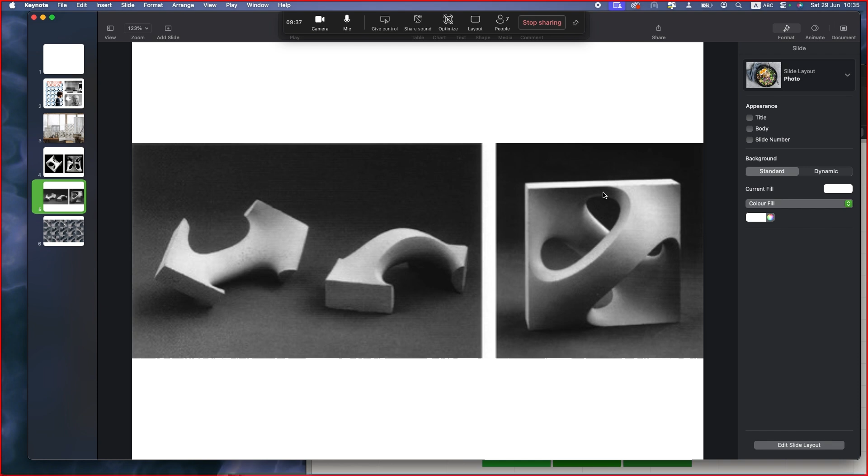And in reality, even though they look quite complex, the module by itself is pretty easy. It's just one shape that is not that hard. So this module here, for example, is the one that he used to create this one, because the actual module is this.

So it repeats in space like this. Okay, I got a little bit ahead, but okay. So it makes this effect here.

So today I will show you quite an easy way to reproduce this type of thing. Even though there are many things that you can do, like you can make it completely parametric, so that the pattern inside is also parameterized. Today we don't have that much time because we will be talking for about 1 hour, 1 hour and a half. So I will show you an easy way to do it,

and also a pretty fun one. If you have basic skills in Grasshopper, you can do it. But I expect that you already know how to move around in Grasshopper, how to put in components, what the panels are, so that you know how to move around.

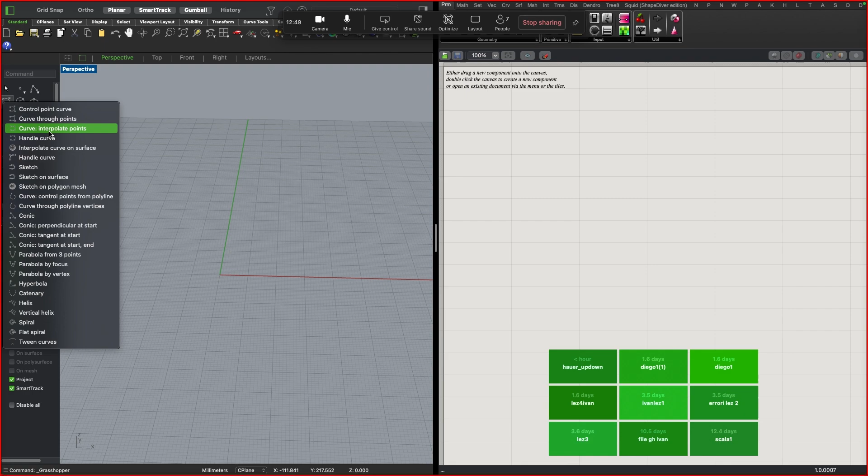I will use Curve Interpolate Points to create one side, and I will just do a wavy thing. With Alt held, I'm going to click on the blue arrow and just write a value, so it will make a copy of my line. And then I'm going to use the gumball and scale with the green square, and I will just slightly turn it.

And then maybe I will slightly change it so that it gives us a little bit of a different feeling. No, this is ugly. Okay, like this. So, let's just loft it.

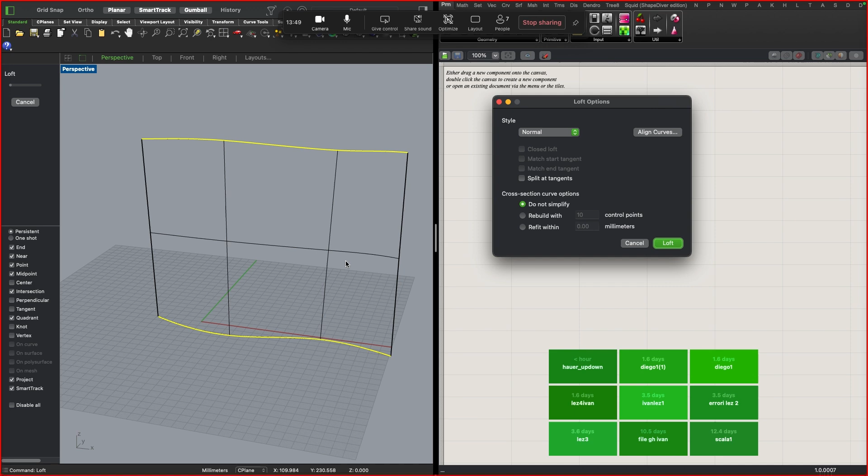Okay. Okay, let me just flip it. Okay, so here we are.

So we will start with doing this one here, as I said, just because the module is easier. Where is it? Here, this one. So this one basically is one strip on the bottom and one strip on the top part. And then they repeat itself, and the point where they connect, they create this kind of shape of a cross.

So in this webinar, I saw that many people do it differently. Today we will be working with meshes, because since we're gonna make a pattern that will consist of many modulars, the meshes, when you apply them, are a lot less consuming. And then you can also get these really soft shapes with the meshes by subdivision. I will show you today how to do it.

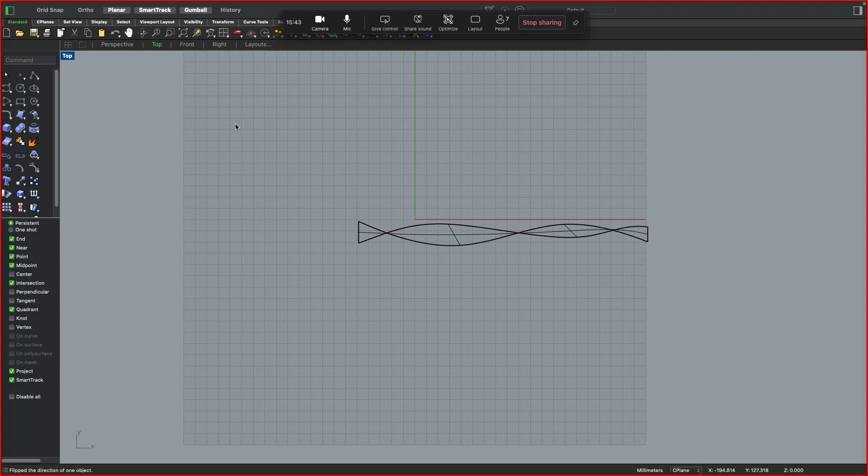So you can start from a really simple basic shape made of polygons. Then we're gonna transfer it to the mesh. And then after the whole is done, we're gonna do a subdivision. So in order to do those stripes there, I'm gonna start with a simple square. The square can have whatever size that you want. And I'm gonna start with a simple polygon here, like this, going to the middle.

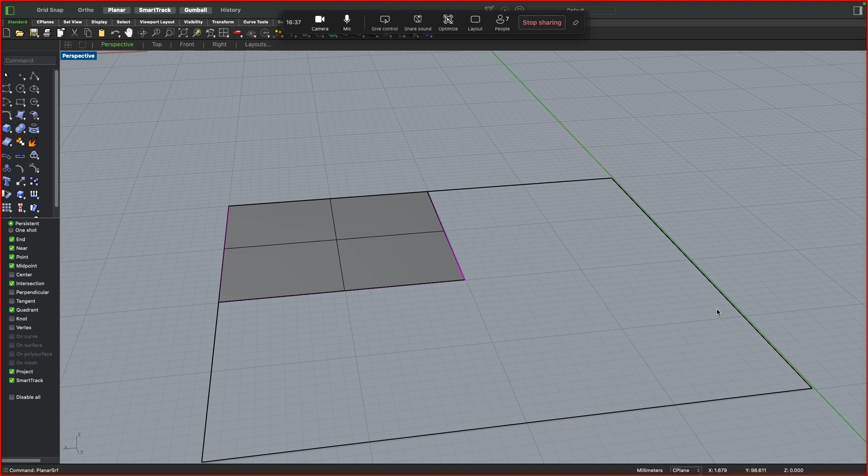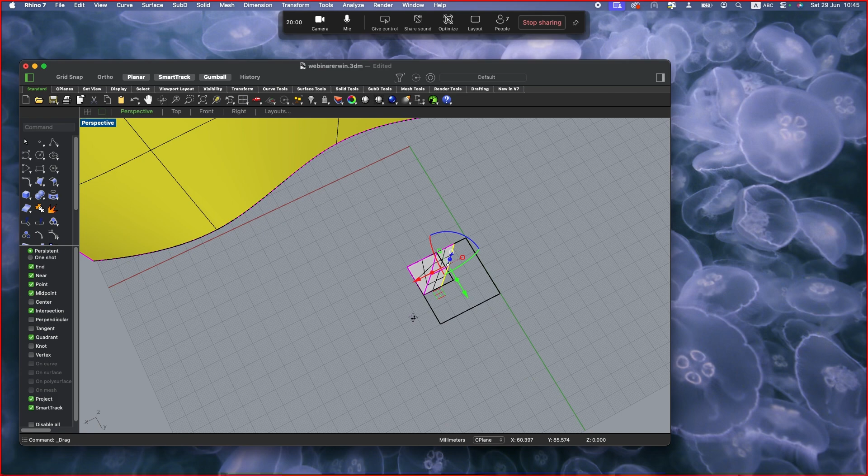And then what I'm gonna do is make a planar surface. And by clicking Command, or Control Shift if you're on Windows, I can just choose one point. Okay, now wait, I will copy this one for a moment. So I'm gonna choose my vertex and just move it here. Here it is. And then I'm gonna just extrude it here. I know it looks strange, but it will look fine.

Maybe I will just make the lines. Okay, maybe we will just do it from the lines. So basically what we are trying to shape is something like this. So I'm gonna do a diagonal line to do it. And then here it is. Then I'm gonna put a point here wherever I want to, and make the line like this. Then I'm gonna mirror it, and then mirror it again.

So since we are working with meshes, the important thing is that all of the polygons that you use have to have 4 edges. It can be only 4 in order for it to work well. Sometimes you also do 3, so there are triangular meshes and there are quad meshes. I suggest, at least in the start, just to do quad meshes.

And now we just need to do one mesh here. So I'm gonna use polyline. Here it is. So I'm making a closed curve and then I'm making a planar surface. Then I'm going to mirror it like this and like this. Then I'm just going to unite all of them, and with Control Shift I'm gonna choose these edges here, and with the gumball I just put them up like this. So we got something. I will just flip it.

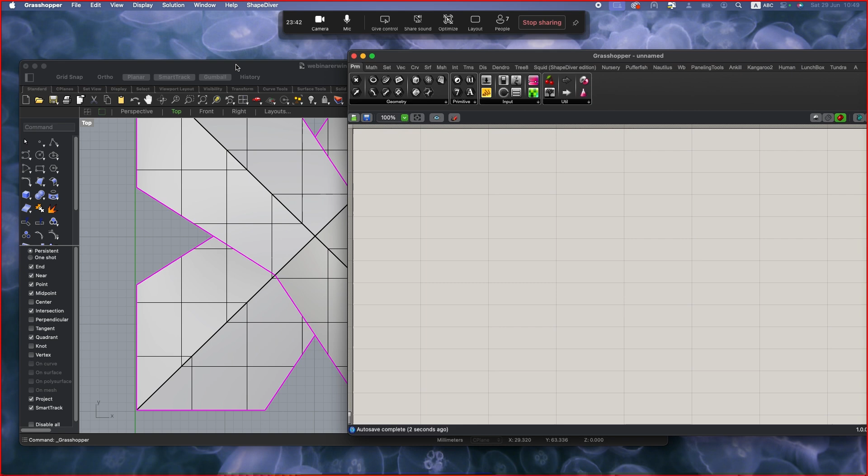Now we need to apply it to our surface. So I'm going to Grasshopper. New document. Okay, since I basically made surfaces, I need to convert them into meshes. So I'm gonna select both of these elements here, and I double click and I write brep because it's a brep. And then I need to transform it into the mesh. Set multiple breps so that both of them get inside of the same one.

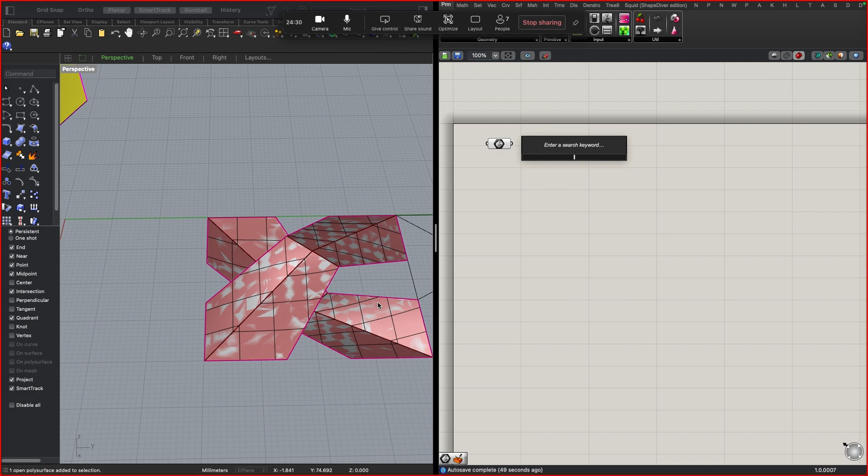And for this, there is this instrument that is called simple mesh, because in this case I want us to have the simplest geometry possible. Since I designed it in this way, that it has 4 edges all the time, I can just tell it to follow the most basic structure. So when you go to the Mesh tab, to the Util panel, you can choose this instrument that is called Simple Mesh, if it clicks. If it clicks. Why?

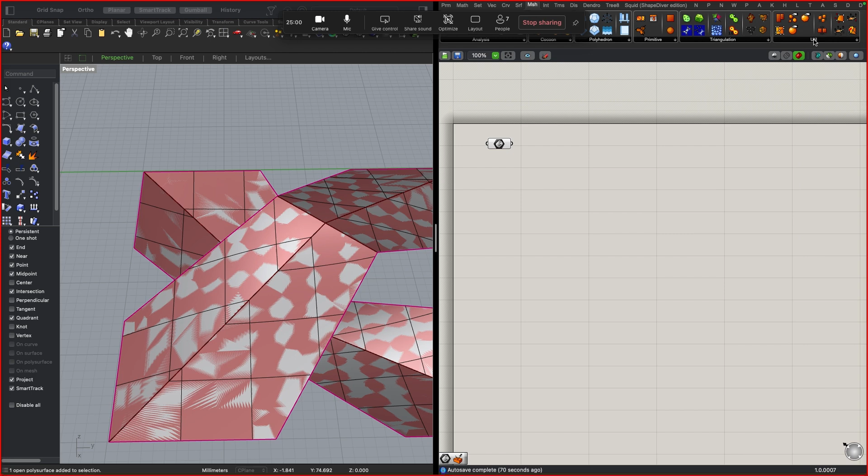Okay, I will just type it, but in case you know that it's in util. So simple mesh. And I connect the brep to the mesh, and here it is. So this is really good for when you have something really simple. And the only thing that you have to have in mind is that it has to be only 4 edges.

And when I'm going to use Weaverbird, there is this instrument that is called SubD. As we know from Rhino 7, we have SubD already integrated into the official version of Rhino. But SubD in reality existed many years before, because it's a mathematical formula of tessellation of the mesh. So basically what does SubD do? It subdivides your mesh, all the edges get twice more points. That's why they get more curvature.

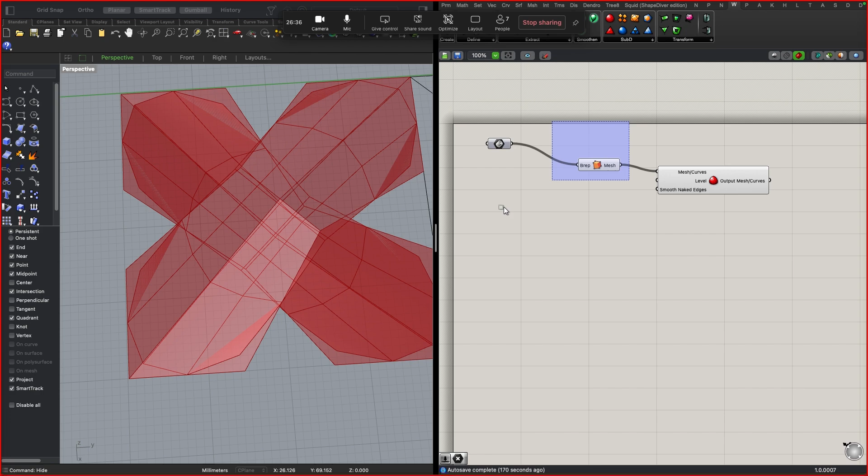So if you go to Weaverbird, one of the plugins that I sent you by email yesterday, they have this whole panel SubD, where you can do different subdivisions. And for the quad mesh, in order to smooth it out, you should use Weaverbird Catmull-Clark subdivision. It's the one that is used with the SubD faces. So I will put it here. I just want to show you what will happen with your geometry after. It will start to smooth out.

So you can get super smooth shapes in almost no time. In this case, I have smoothing also of the naked edges. If I put the corner fixed, it would look more like this. So you can use a really simple geometry in order to arrive at a really smooth one after. So I will delete it because we don't need it for now. We will use it later.

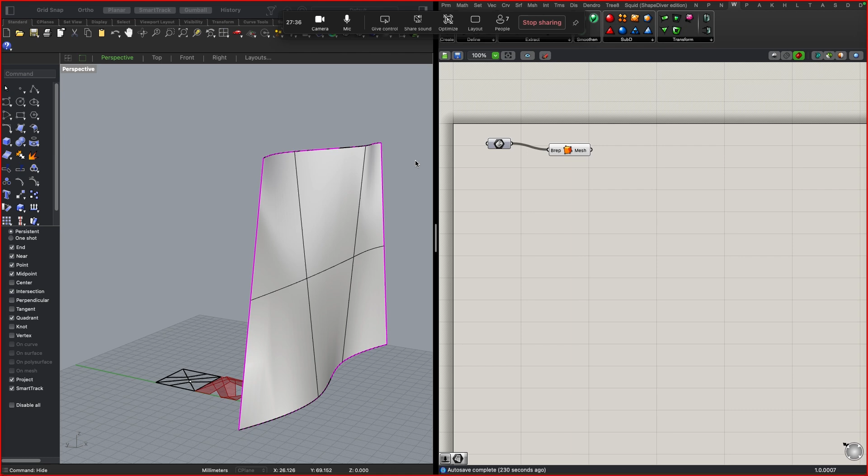And we're going to use this technique of paneling, when you subdivide your surface or your mesh into quad panels, and then each quad panel will be like a box container. So in this case here, I'm having a surface. So what we can use is, for example, we can go to Pufferfish. Okay, Pufferfish, where is it? Pufferfish is a plugin that I also asked you to install. It's because it has really fast tools to make transform boxes in a minute, so that you don't need to suffer.

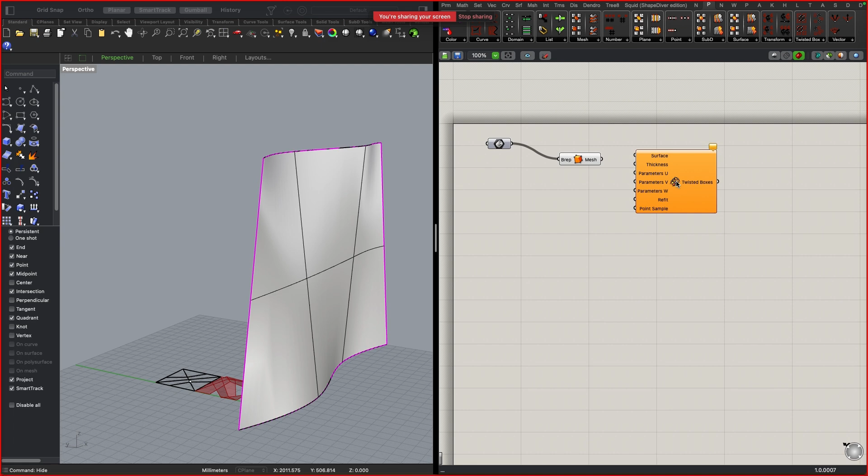So if you go to the surface, we will use the one that is not here, because it will be in the twisted box. Yes. So here we will use surface twisted box, we just need one surface. Twisted box surface. It's the simplest one. So this one just takes your surface that we obviously need to put from Rhino. So we double click, we write surface. Here we have the container for the surfaces, and we click and set one surface. We connect it to the surface input.

Then it asks us for the thickness. Basically, it's how profound you want your pattern to be. So you just do a slider, double click, and you write from 0 to 2 to 100. We will see in the future what will work best. Okay, in this case, let me just hide it. Okay, in this case, by default, it makes you 2 boxes. I need just one, so I need to change my parameters.

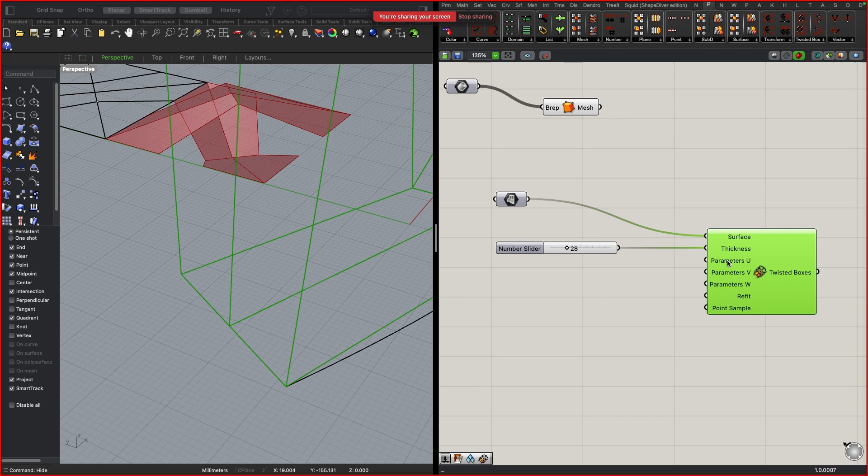So here, it will ask me for division parameters along surface U domain and V domain. So basically this is how many boxes you want in this direction and how many boxes you want in that direction. In order to do it, you put a range component, with the number of steps, where steps will be the amount of boxes that you want. Here, by default, you have domain from 0 to 1. So the range will be all of these numbers from 0 to 1. And if I connect it to U, you will see it changes the number of boxes.

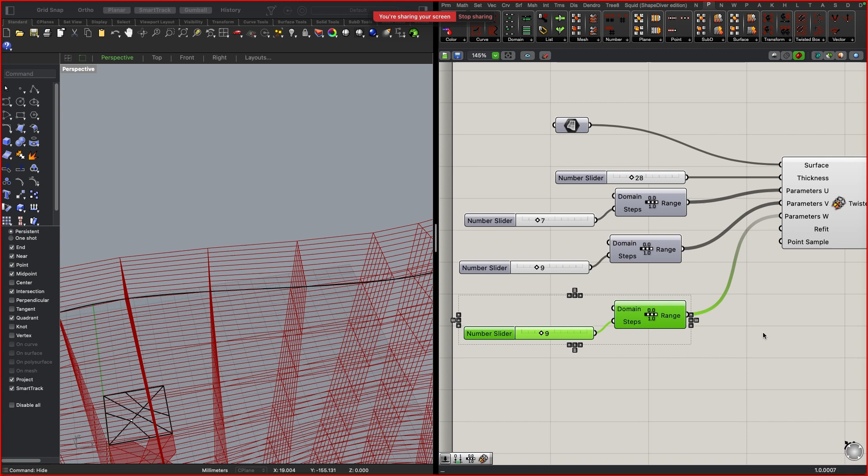So I'm just going to Ctrl+C, Ctrl+V. Here it is. And then you can just put the amount of boxes that you want. Here I have 2 boxes because by default it is making 2, but I need just 1. So I will Ctrl+C, Ctrl+V, and I will put here 1. If you put 0, nothing works, so don't put 0. Okay, so we have boxes.

Okay, and now what we got here is the twisted box. I have it kind of too thick maybe, so let me just make it smaller. And then we're gonna use the tool from the transform toolbar, and we will use the instruments from the morph column. And we're gonna use the one that is called box morph.

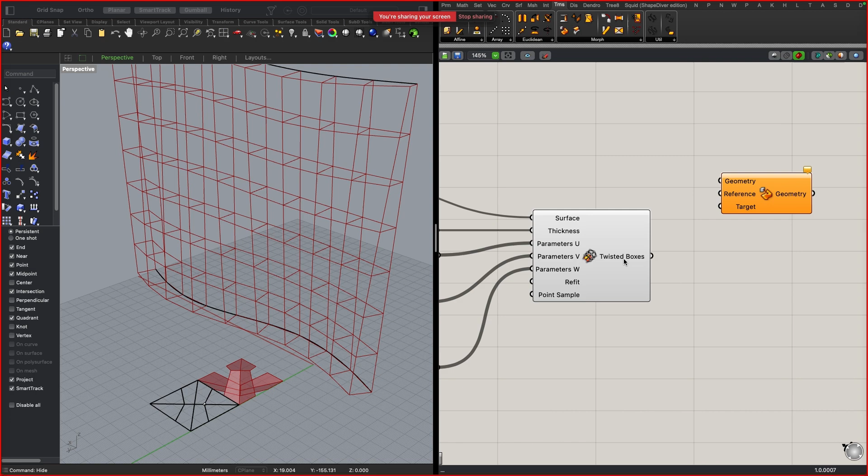It requires a target, so basically this is the boxes that I want to map this one to. As you have seen, I already made it into the box shape, so this is useful. So I put it here. Then the geometry is the one that I put here, and the reference, it's asking me for the reference box. So basically, what is the box that contains this geometry? In order to do it, you can just use the primitive container box, bounding box. Here we are. And you just connect it here.

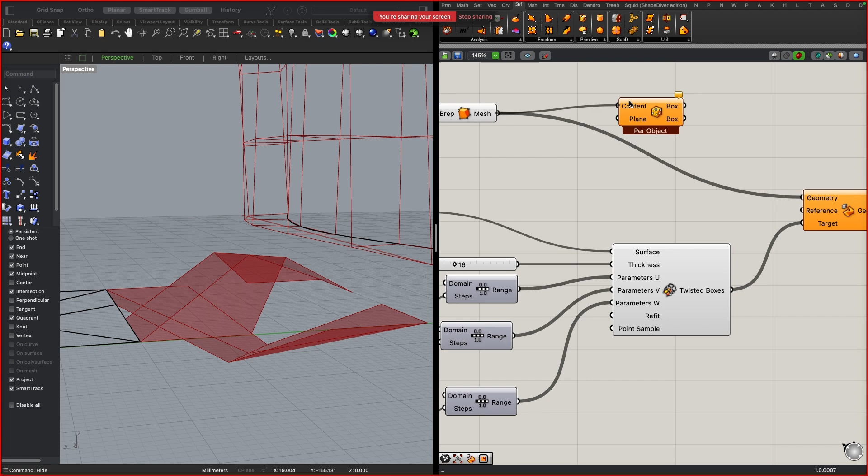But you will see 2 boxes actually here. I don't know if it's noticeable on the screen, but if I put a panel here, you will see box 0, box 1. We need just 1 box for all of the geometry. So in order to do it, I need to right-click here and click union box. And then we put it into the reference.

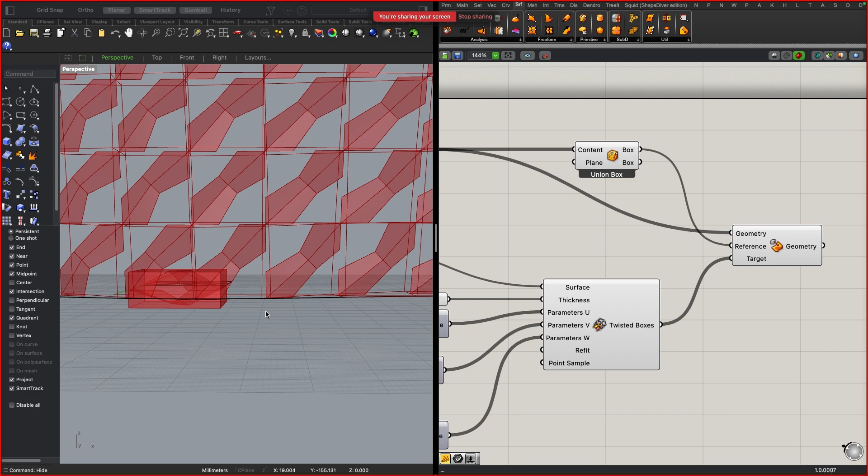And here we are. But as you have seen, something strange is going on. It just put only 1 element. Why is that? It's because of the way Grasshopper works: when you do this type of thing, if you have more than 1 component that you want to move inside, you have to group. So you just put group, and you put it into geometry. And here we are. Pretty.

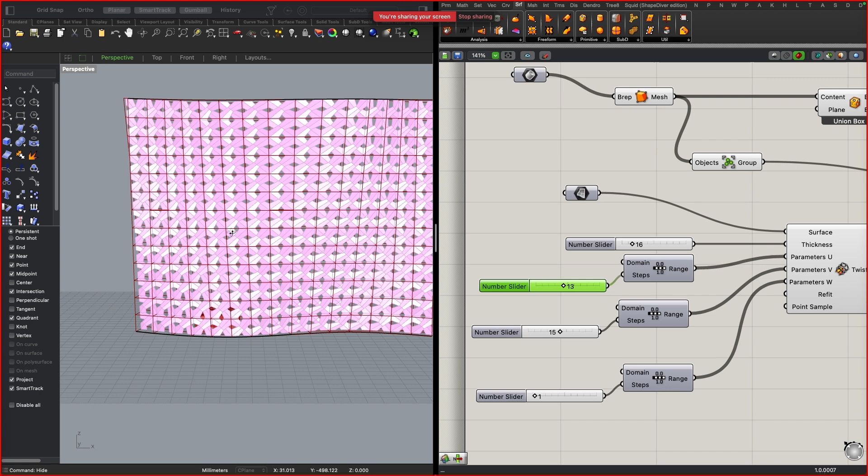So let's do preview. And now when we move around, we get different density of the pattern. Yeah. So kind of cool. And the great thing about it is that if, for example, I want to change my pattern, like I decided that the opening is too small. Oh no, I wasn't supposed to choose it here, on the top. And I will just use the scale. Here it is. You will see that everything here updated as well.

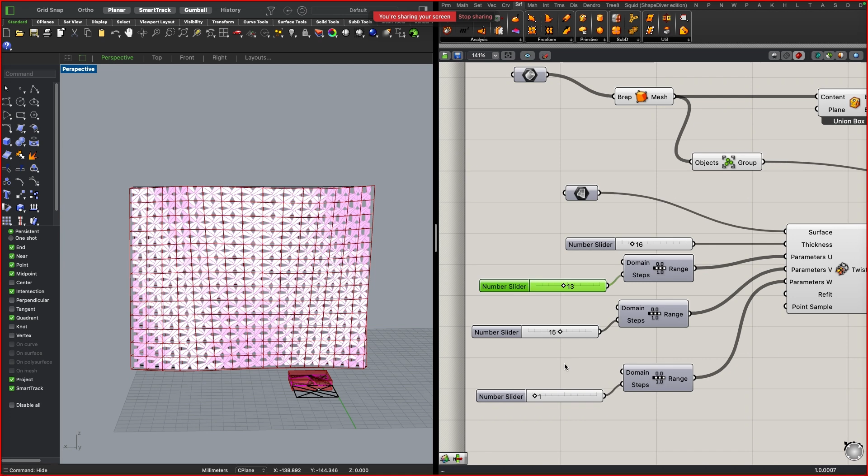Okay, great. So now we want to smooth it out. We got our basic geometry, it's there. So let's just go ahead and smooth it. But before we do it, we do ungroup. Ungroup, here it is. And then we will have all of these groups here. So basically, if I call the param viewer, if you don't know what it is, it's basically a tool that helps you to see your data tree. So we will have a bunch of groups and all of them have these two elements here. So here it is. So if you see the tree, a lot of lines.

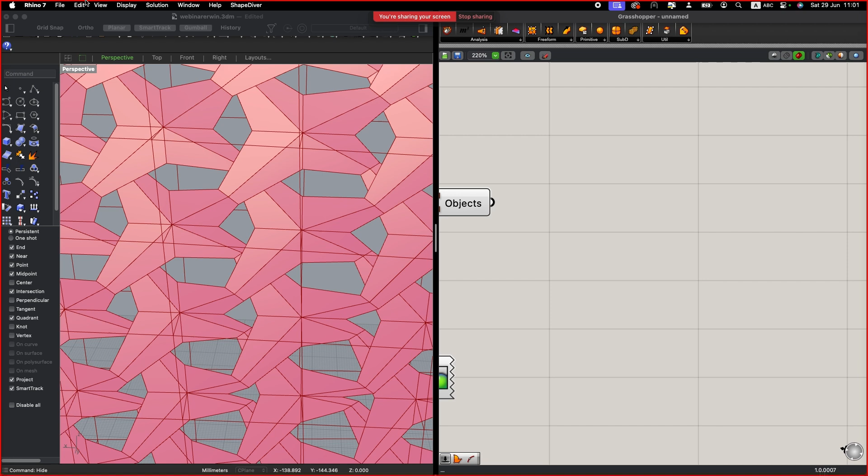But in order to smooth it out in the right way, I cannot just smooth out this, because let me show you, and also I should save, you know, because with my computer, as we understood, save is important. Okay.

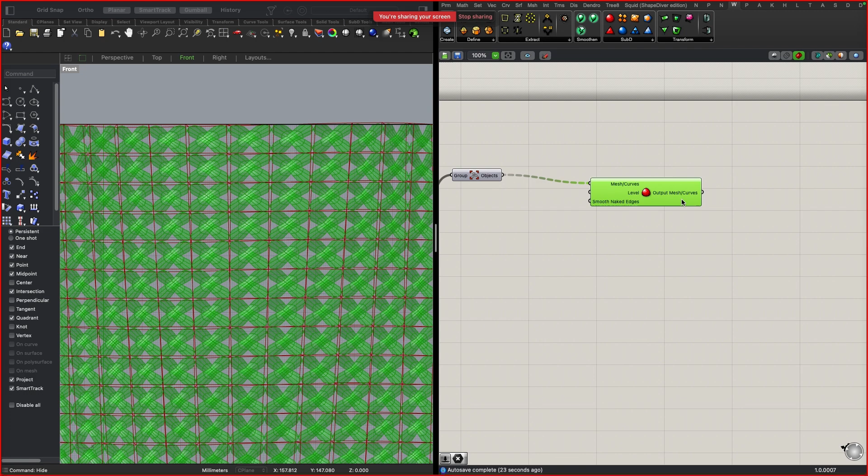So let's say I will do the SubD thing right now. It will not look pretty. Here. This is not what we wanted, because we have all of these holes, even though it could be an idea also, it's not that bad, but it's not what I wanted. It happens because it is doing subdivision on each separate mesh. So I need just one united mesh for this now. So in order to do it, I'm gonna flatten the list.

Here. And then it's many meshes. It's 300 meshes right now. So what I need to do is I need to join the mesh and then I need to weld it. So what we're gonna do, we go to mesh, util, and we're gonna choose mesh join here. And we connect our tree to mesh join. So, okay, joined.

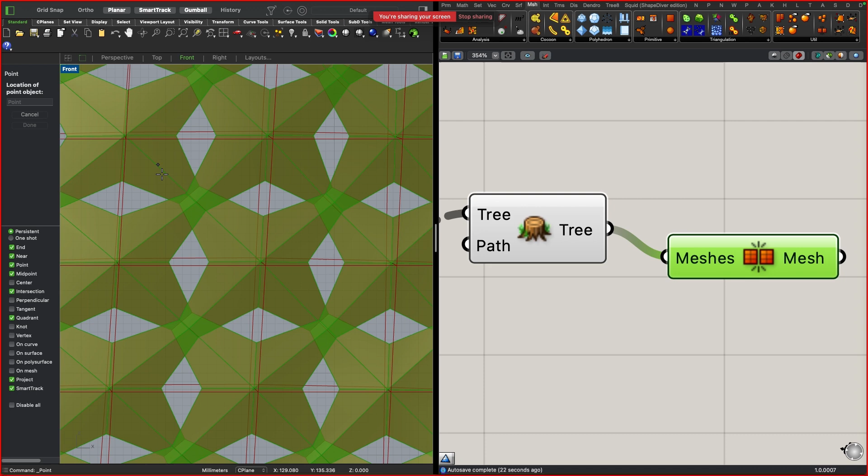But now we need also to weld it, so that it's all clean, because sometimes we need to align vertices, we need to clean it, because when you unite the mesh like this, you have some points that overlap. Like, for example, where I have the lines, here, in reality it's 5 different points from 5 different meshes. Sometimes your program will do a good job aligning vertices by itself, but most of the time, no.

So I suggest you use this component from Kangaroo. We made another webinar about Kangaroo, but basically it's a physical simulation, and it has some really great components that you can use also outside of the physical simulation. And there is this one that is called Combine and Clean Mesh. So basically, instead of writing align the vertices and all of these commands, you just connect this one and it will make you a nice, clean, cute mesh here. Here.

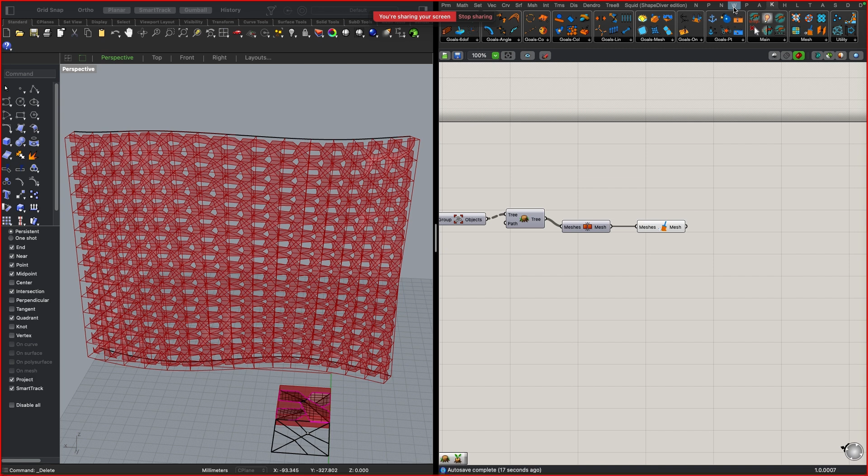Here it is. And then here on this one, we can start to subdivide. This is where shit gets pretty. So. Also, it still makes mistakes.

So also, we probably need to align it anyway. So you go to Util and we choose the align vertices. Sometimes it happens because, for example, in my document here, I have the tolerance of 0.001. So it's a really high tolerance that you usually never need, but I have it.

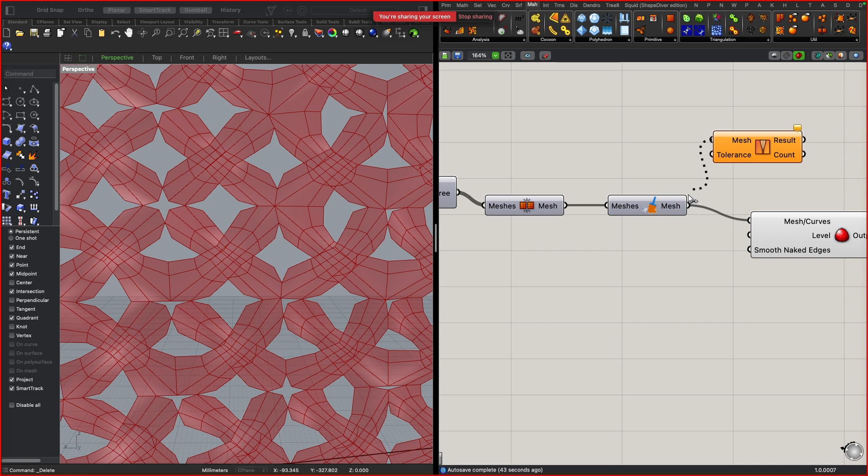So I'm gonna connect my mesh to the clean mesh, and here in the tolerance, I'm gonna put 0.1. So all of the vertices that are in the radius of 0.1, they will get smashed together, they will pull and it will become just one point. So let's try this and see how it works. And it works. No, it doesn't.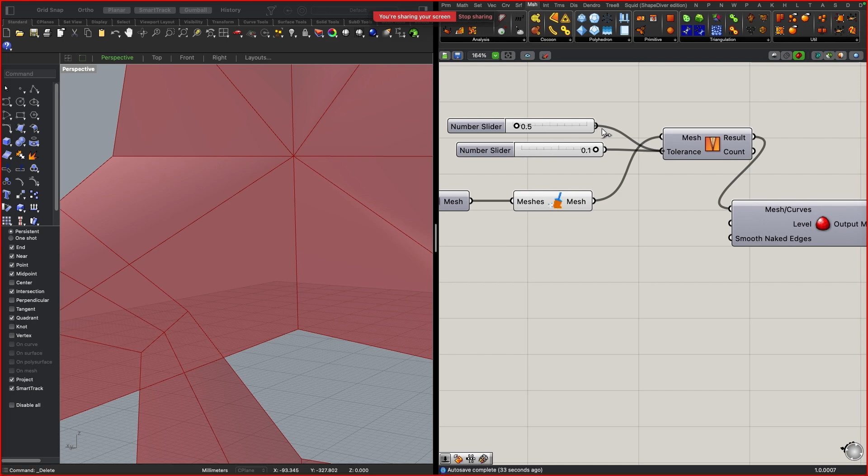Let me see what happens here. Preview off, preview off. Let's see. Okay, so he is having problem with aligning these babies. So I'm just gonna put a bigger threshold. So 0.5 to 0.1, and we will see if it will work. Echo. Yeah, now it worked.

So in case if you have the same mistake, the same problem as me, sometimes it works, sometimes it's not. Let's see. So echo. So let me just see for a second, because maybe the problem is my module.

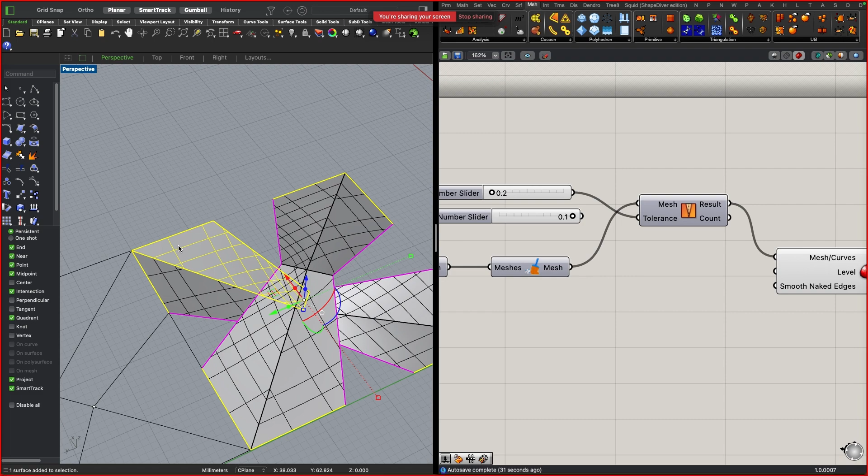So the thing is that this has to be on the same, let's say, panel. So I will just choose all of my edges outside and see if they merge. Let's see. Okay, no, they align perfectly. So let's just do like this. I'm gonna do this and

let me just make it slightly flatter, maybe it will be easier for him. Like this. Okay. So, and I will also make some aligned vertices. And what we should do, we also should flip it. So

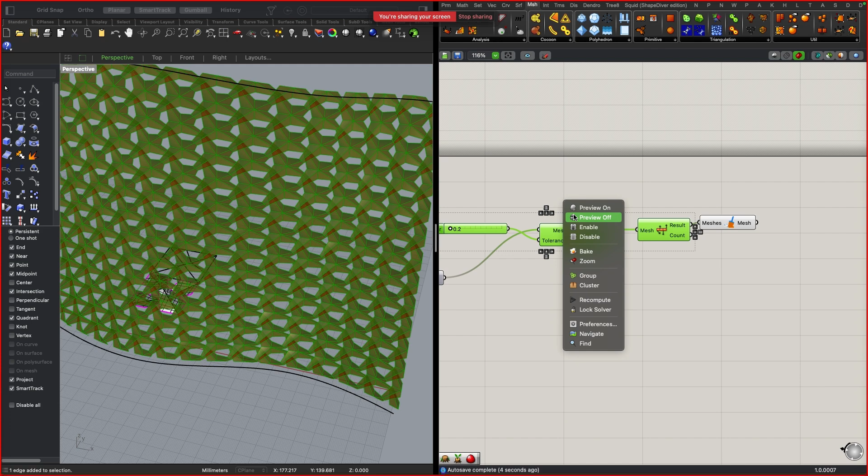we will use unify mesh to unify the normals, because it could be also about unifying them. Here I will still put like 0.2, it should be enough for the tolerance. And then I'm gonna use clean and combine so that it will weld it all together. And now maybe if I'm lucky enough, it's gonna work. But we will see.

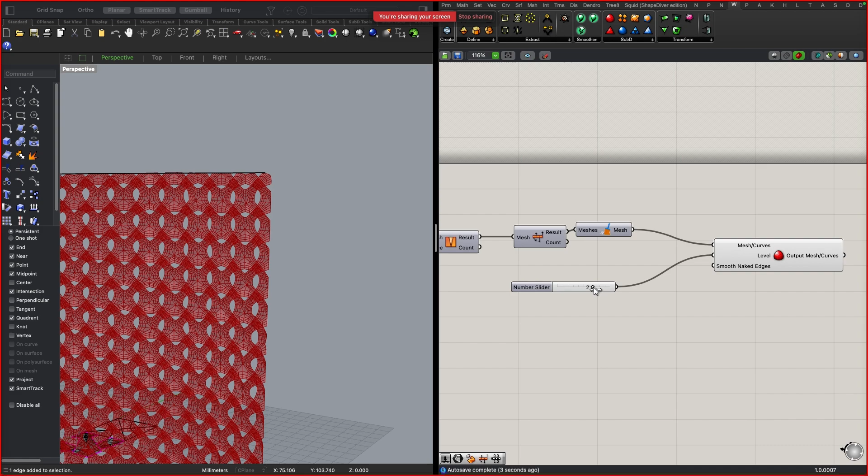Ah, okay, here. So I choose not to smooth out, or at least make the corner fixed so that they meet at the corner, and then it should work. And as the level of subdivision, you can go up to 3. I don't suggest you do it because 3 will take you a lot of computational power, but up to this, it looks nice.

So the problem that we were having was due to these smooth naked edges. So here put corner fixed or smooth here. So here it is. What else could we do, for example? We could make it, for example, that it changes its width, yeah?

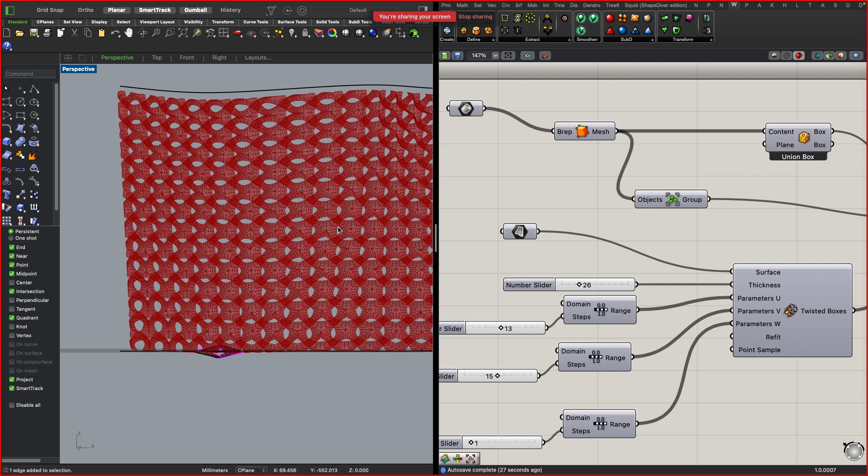So for example, what you could do is that one module is bigger, like the spacing is bigger, and then one module has less spacing. So in order to do it, we do Ctrl C, Ctrl V of these ones here. And basically, let's say I want to have an attractor point somewhere here. And let's say I want to have more holes in the middle, more spacing in the middle.

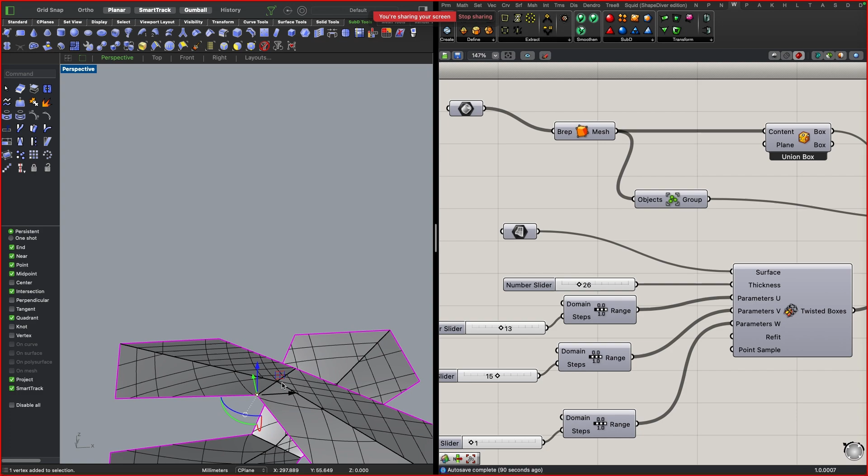So in order to do it, we would have to change our module. So we would have to make the first model and the model where we want to arrive. So I need to choose my edge vertices here. If you're having problems with choosing stuff, if you go to SubD Tools, into the filter here, SubD, here you can choose vertices, and it will allow you to choose the vertices only.

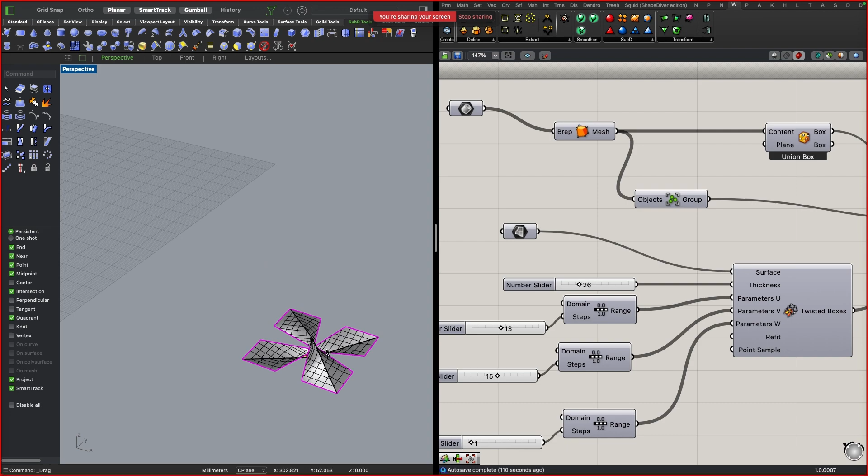So in case you're having problems with Ctrl Shift, Alt Shift, you can just make a filter on this. And I'm gonna make it a lot smaller. Like this. Maybe it's got too small, but okay, we will try. And maybe I want this to be smaller also, because it seems to make too big a space here. So let me just adjust it a little bit.

In order, you see now I cannot move anything because I have the filter on. So you just deselect the filter and then you can delete it. Okay, I will turn off my component here and disable it so that it doesn't update every time I update my module. So I think what I'm gonna do, I will just quickly adjust it.

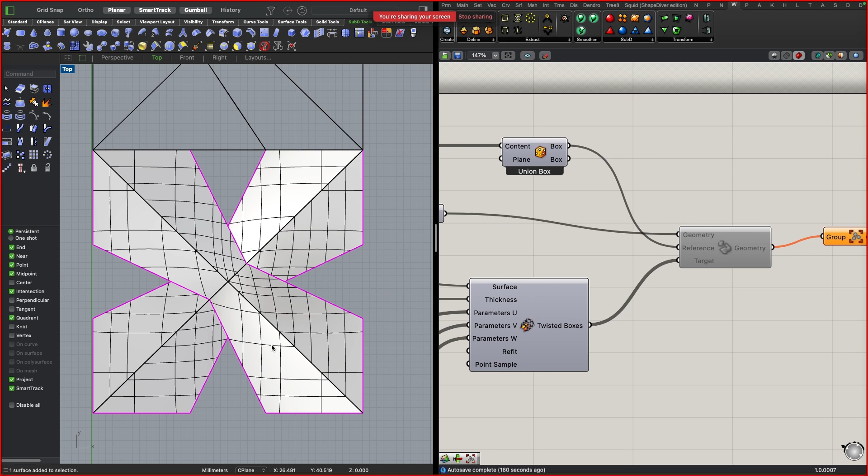So I'm gonna just explode it, and I will just move this a little bit like this, and then I'm just gonna mirror it.

I suggest you have the project activated so that it's easier for you to move things around and that you don't get it rotated in a strange manner. Here it is. Okay.

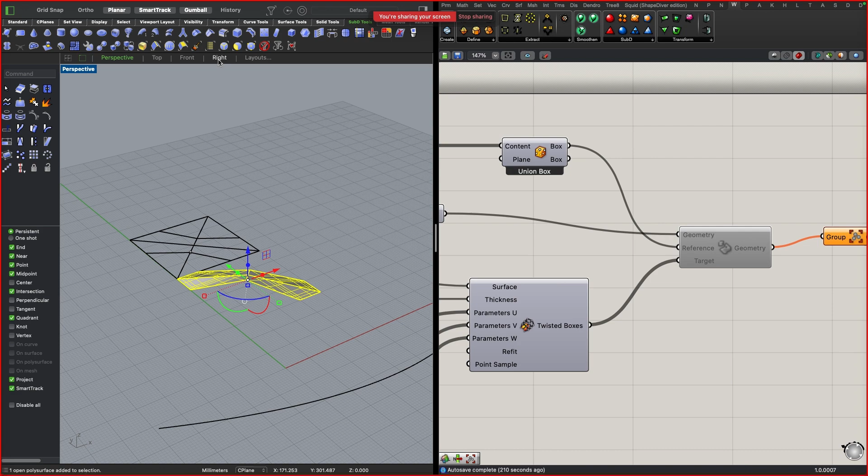And then I'm gonna do the same thing that I did here, and I'm gonna mirror it. Of course you could code this, like everything of this could be coded. It's just that in this webinar it would take us more time. Also, you could calculate this on your panel, for example. There are many things to do it. I'm just showing you one of the easiest ways.

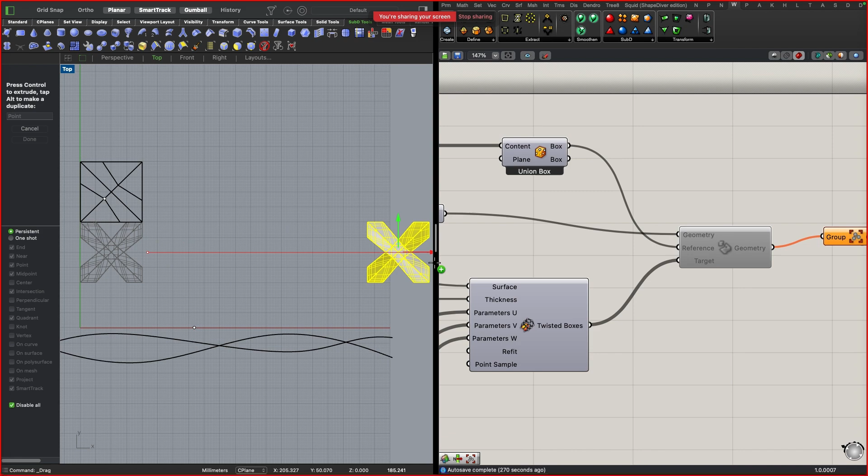Okay, and I will make this larger here. And then I'm gonna make Alt and copy it. Then this one, I'm gonna make it smaller with the scale. Okay, and then this, I'm gonna move it up.

And now, in order to make the transition from one mesh to another, I'm gonna calculate all of the transitions between them.

So basically this is really useful also, for example, in architecture, because in Grasshopper, usually we make these things that change constantly. You have 1 million variations, yes, but usually in architecture you cannot do every module different from each other. You have to have like 6 modules, 7 modules, 10 modules if your project has a big budget. So you cannot do all of these transformations like this if it's not a 3D printed project.

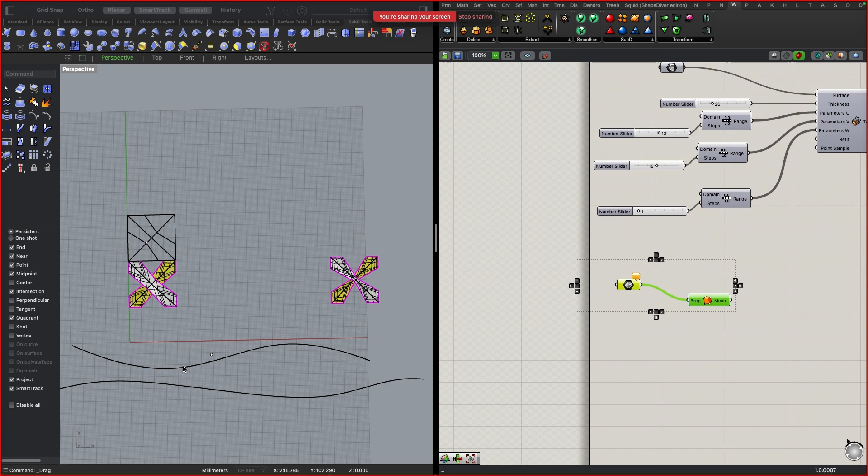You have to have a final number of modules that you can use in your project. So in order to do it, since all of the modules we use here have the same number of edges, the same number of vertices, the same number of everything, we can just make tweening of the shape. So I will add this here, set multiple BRep.

And then I will do the same, Ctrl+C, Ctrl+V, with the new one. Then I'm gonna use join mesh again, and maybe clean and combine mesh also. So I'm gonna combine and clean, and also combine and clean here.

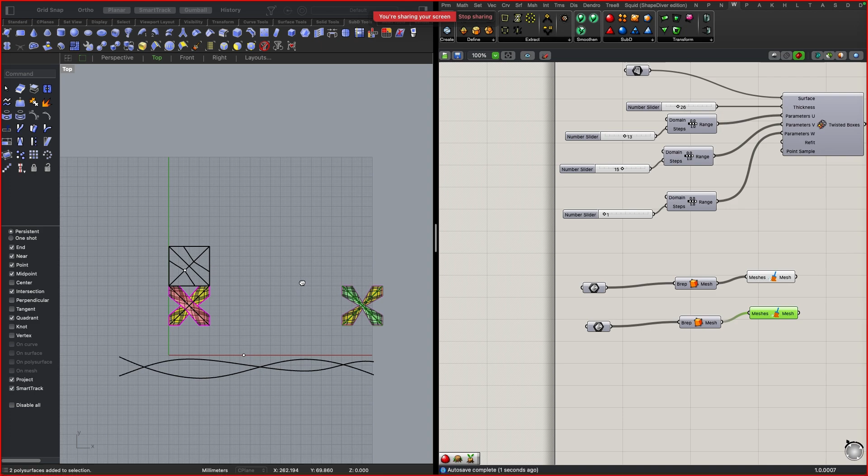So let me just turn off this here. Okay, seems quite cool, they seem to be pretty clean. And now we're gonna use the Pufferfish instrument here.

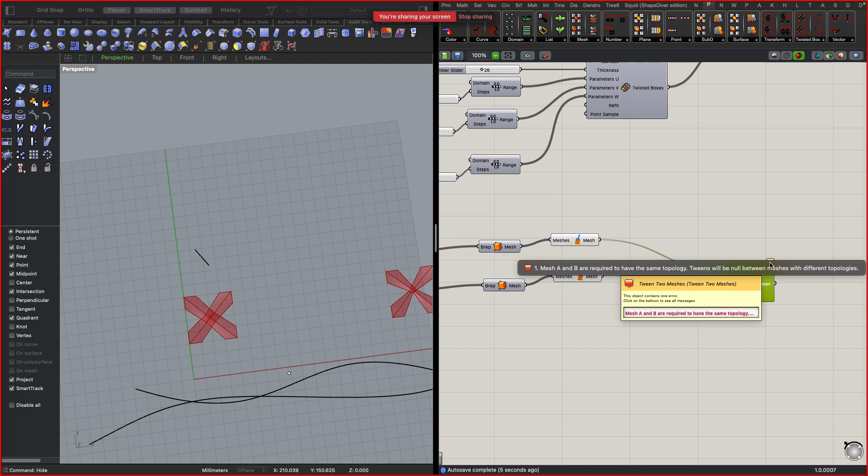And we're gonna use something called Tween Two Meshes. So basically you have mesh A, mesh B, and then you need to add a factor. He says to me... okay, here he says that they're different.

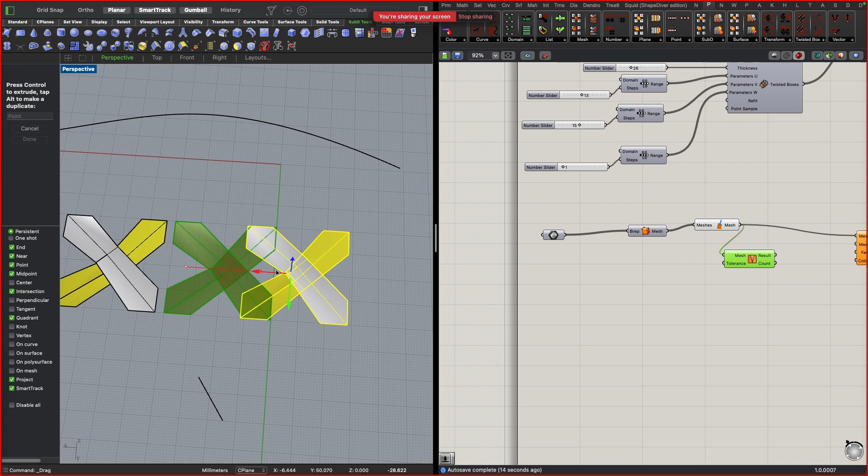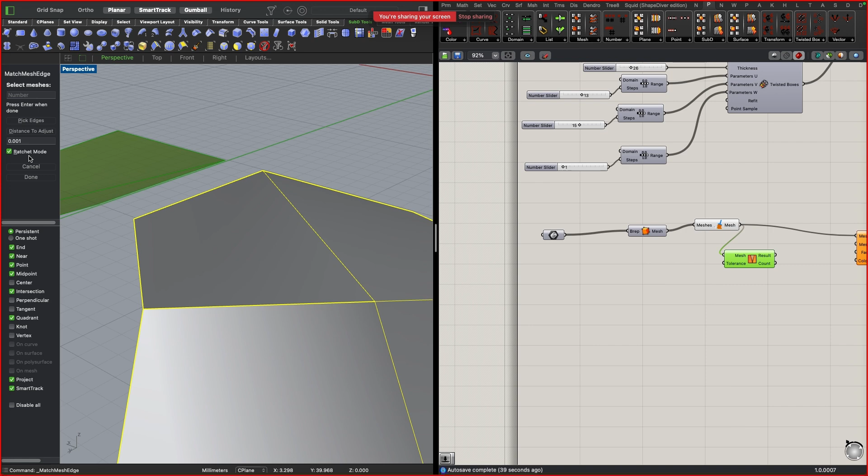So, okay, so that's the problem here, because as you can see, everything is welded except this one. So what we can do, we can go to mesh repair tools and do... let's see if the mesh will work. Okay, maybe we can do join edge. No, here it doesn't work.

Okay, let's use, we will see, weld, angle tolerance. Okay, I think I will just... let's see, collapse. We should do...

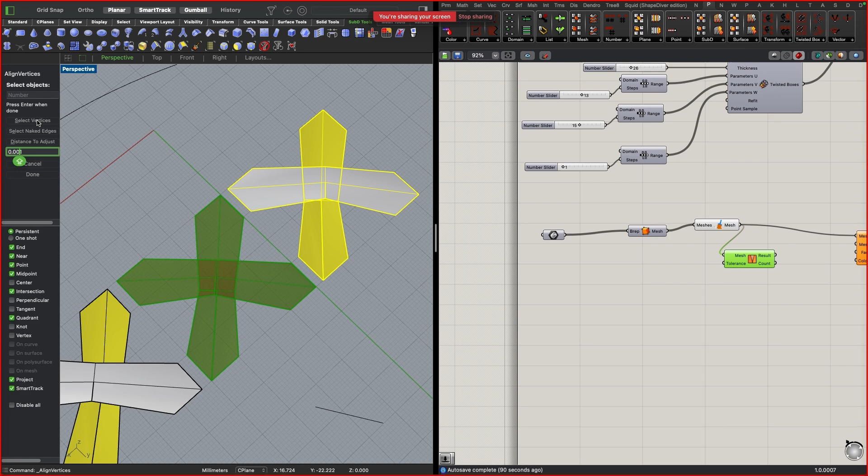Select, okay, so I'm doing align vertices here and I'm just gonna choose my vertices. Okay, no, here, here. There, here it is. This one worked, good.

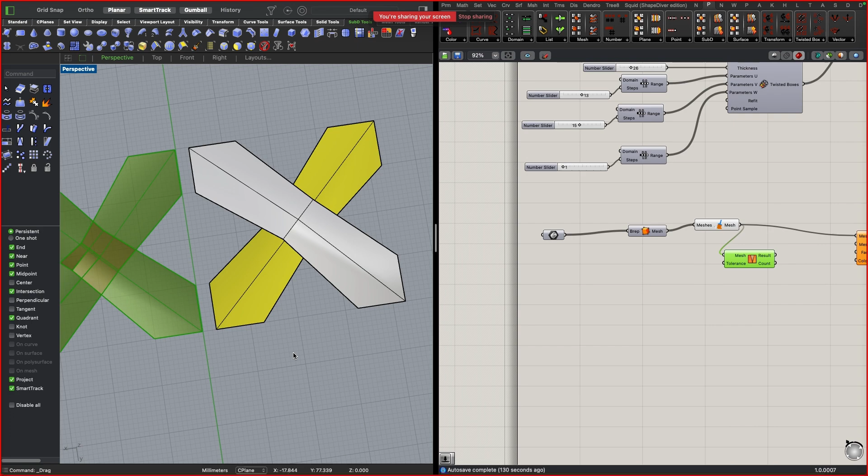So let me delete these ones that didn't work. I'm gonna explode it so that I can delete this one. And this mesh that is already clean, thank God, we will do the mirror. And then rotate it. So now, as you can see, all of the lines are the same, all of the vertices are aligned, so everything is fine, everything works.

So now I will use this one as my next module here. And I will just scale it so that I get this kind of shape.

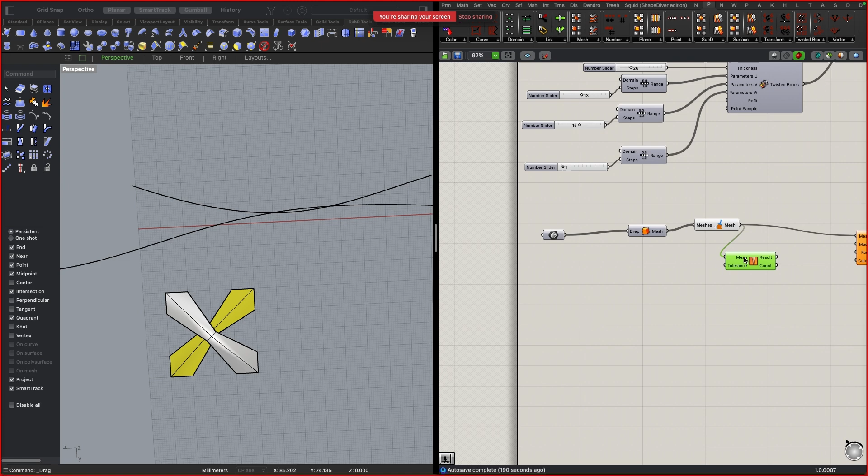Okay, now they will have absolutely the same topology because I used the same approach, basically that's the better way that you should do that. You make one mesh, it works fine, and then you change it. So the only thing that you can do is move around the edges and move around the vertices. Since I already cleaned my mesh, I don't need this.

Mesh, set multiple meshes, and then I will use clean and combine. Here it will be my mesh number 1, and here I will put my another mesh.

So hot today in Milan, I'm dying.

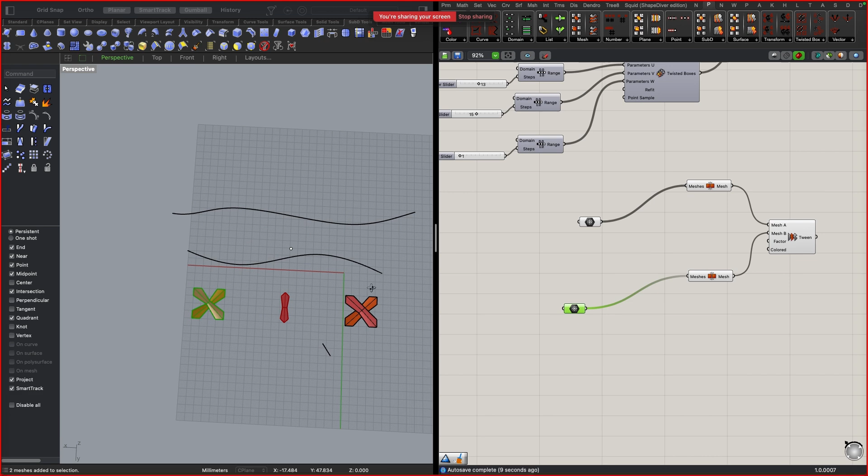Join, let's see, 1 second. So he's just transforming one. Okay, let's see, like this. Okay, so let's do it like that.

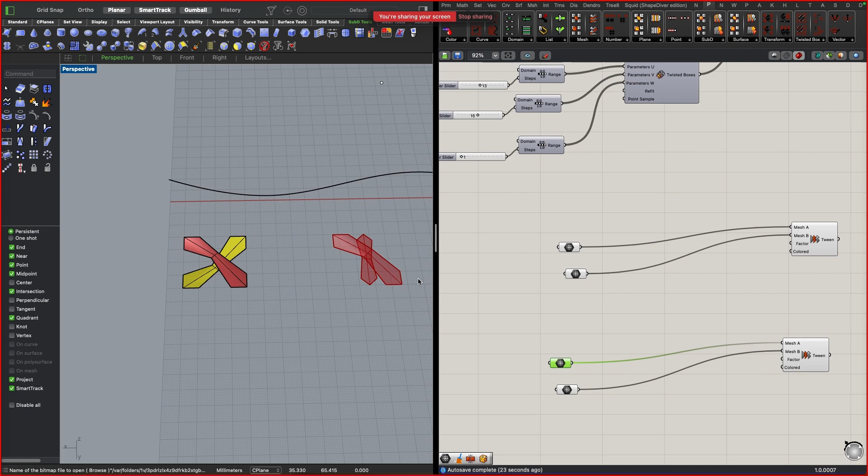So I'm gonna choose these ones on the top. Let's see if it works. Okay, it works, so here he made it. And then we're gonna do the same thing for the bottom ones, since he cannot do it. And now I'm doing the same thing for the bottom part, and for the bottom part here.

So here it is, the factor depends on the range, so it's the same thing as here. We just create a range, we create number of steps, so for example 20. And then we add it here, here, and just give them enough space so that they can breathe.

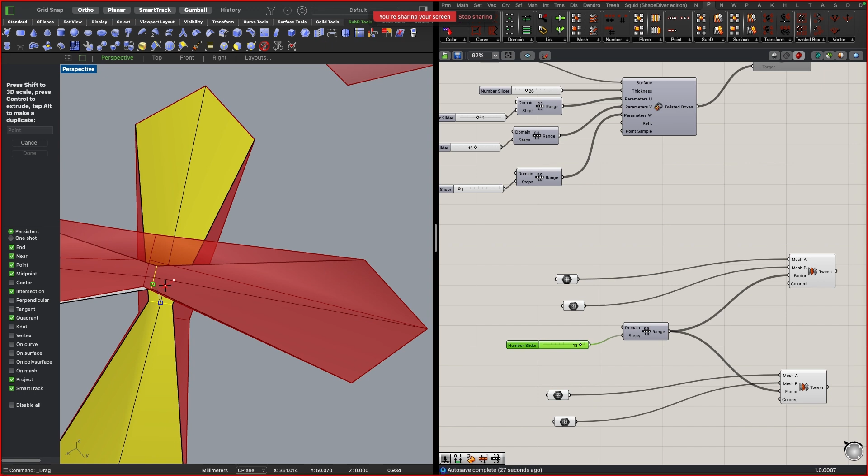So basically what it does, it's tweening from one shape to another. The more dramatic you make the shape difference, the more it can be perceived, let's say. So let me just make... Ecco, so I think now it's pretty obvious.

So here this is going from 1 to this. Perfect, so let's say we want 6 modules here. Okay, 6.

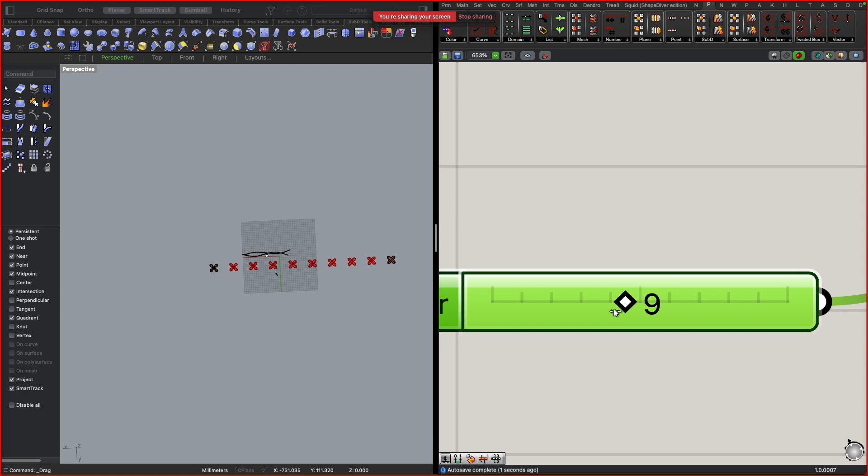And now we have 2 different groups of the meshes, here and here, and we need to combine them because I want this to be in one group. So in order to do it, we do merge, we connect the tween and tween here, and then we do the grafting, so that you're gonna get...

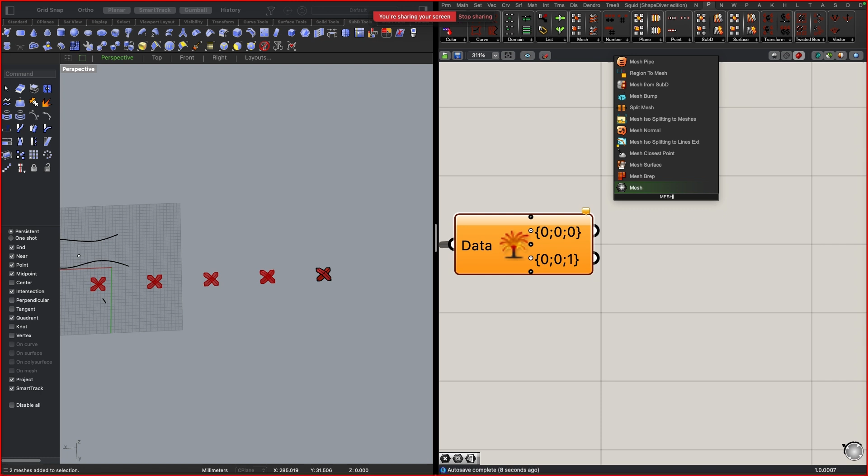them by couples. So if, for example, I'm gonna bang the tree and see what's inside, you will see that now in each group I have my top mesh and my bottom mesh. So let me just connect the mesh to here, and here it is here. So all of them are in their little groups and we can use them as our modules.

Okay, here we have them. And now basically we need to put them here. So we made already twisted boxes here, but now we need to sort them to what is the closest to the point, yeah? So in order to do this, I'm gonna use area. No, sorry, volume, because we need volume. So volume.

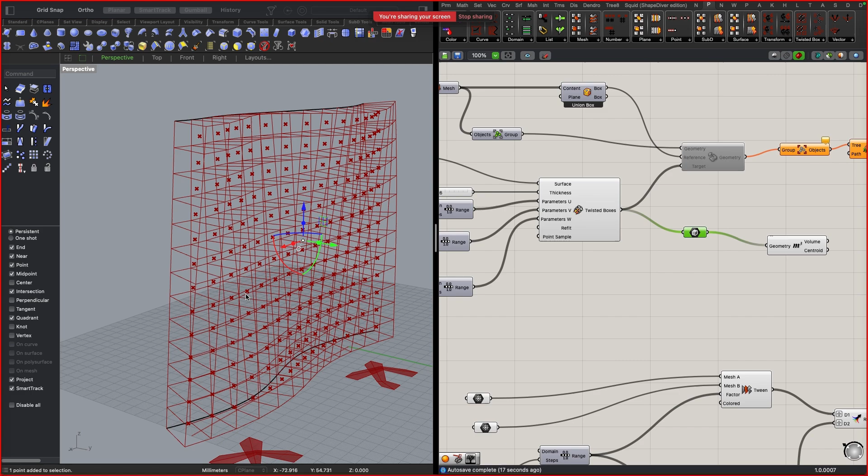And I'm gonna... okay, why? Volume properties could not be solved. So let's see, box. And let's connect this to this, okay. So in case if you had the same problem, just connect the box container, because before he was thinking that it's not a geometry but it's a twisted box, because these are 2 different types of the data in Grasshopper. So just put a box, convert them to boxes, and then you're gonna get all of your points.

And then we're gonna use pull point, and I'm gonna pull the points from the centroid to my point here that I made as my attractor. And I'm gonna do set one point and connect it to the geometry. So here we are, we have all of the distances. So basically we want their bigger distance, like, so this, the closer they're to the point. So if the distance is smaller, we want to put these are the most opened version.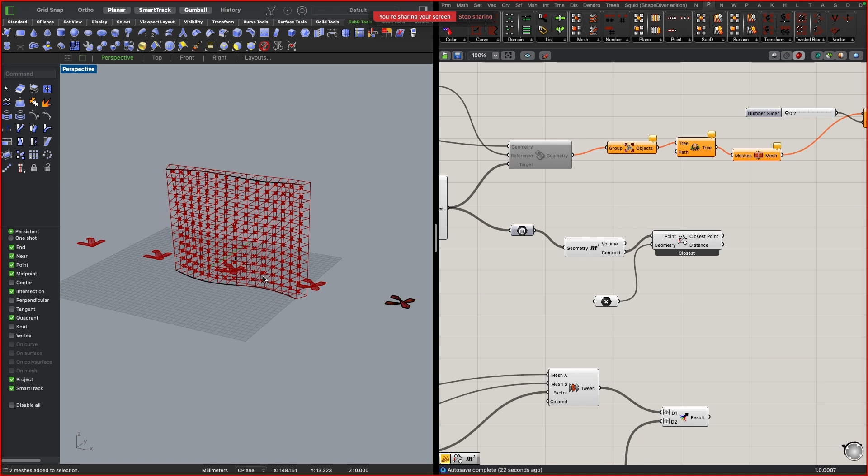No, this one. So what we're gonna do is that we're gonna divide our tree into 6 parts, so that each part will be like the group where you put certain modules.

So in order to do it, we are gonna do a sorting of these boxes, because if you see them right now, list item, you will see that they're sorted right now by X and Y, so it's like this by the rows. So, but I want them to be sorted, so I want to be like first the boxes that are around this point, then the boxes around that, yeah?

So, in order to do it, I'm gonna use sort component, sort the list, and I'm gonna sort my boxes here by the distances that I found here. Okay, sorry, keys to the distances and values A to the box. Okay, so here we are.

We have our boxes, and if I'm gonna do list item right now, list item, so here we are, we have our box that is closest to the point finally. And so all of them, if you're gonna see right now, they're sorted in this way, they go around.

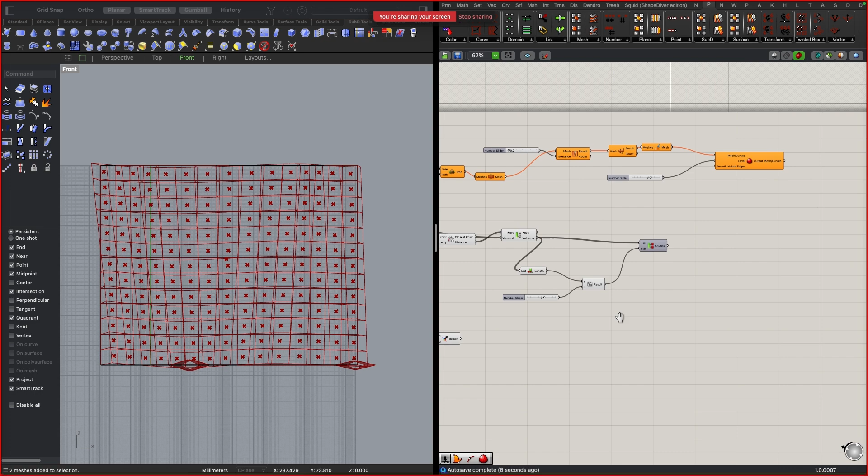And now I'm gonna make out of this. So here I needed 6 groups, so I need to make steps -1. Okay, so now I will group. I need to group them individually. So, ecco, we got 6 groups now.

And now we're gonna do this thing here, but the target we will connect to our box here, and our geometry to here, and container we will connect also to the groups here.

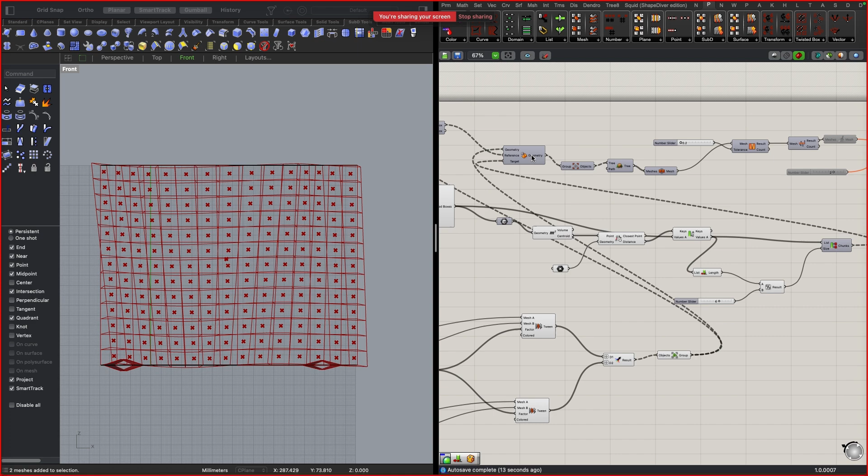Okay, now I suggest you turn off the Weaverbird because it might take a little bit of the execution. And let's see what happened. I'm curious.

Okay, I made it vice versa. So what I should have done, I can just reverse this and it should work. Let me see. Ah no, I should reverse, I should do, okay, 1 second.

So I need to put this one, I need to change them places. So like this, this to this. And then we do enable here. Ecco, here it is.

Of course, the more drastically you change your components between each other, the more drastic effect you're gonna get. So for example...

So let's just make it really far away from what intended, Erwin, but I hope he forgets.

So here you can see the model effect. Okay, and now we're gonna do the thing. We're gonna do our thing here. And let me make preview.

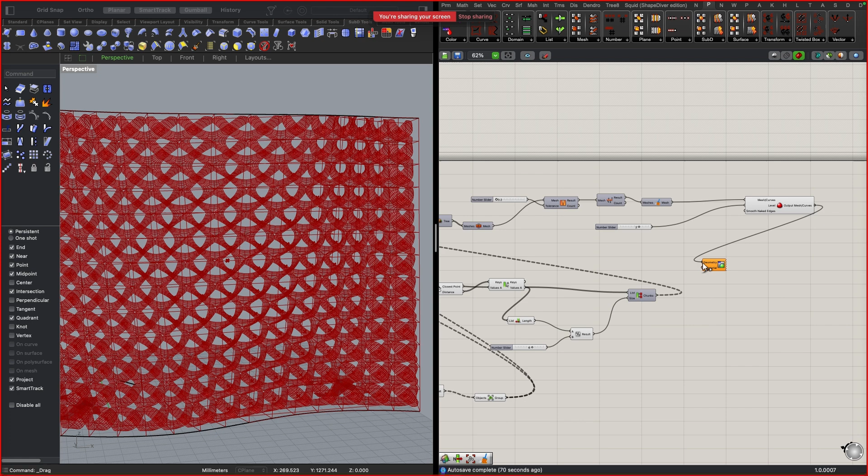Here, and let's try to disable this. Let's see what happens if I smooth out everything. No, it makes strange things, so corner fixed.

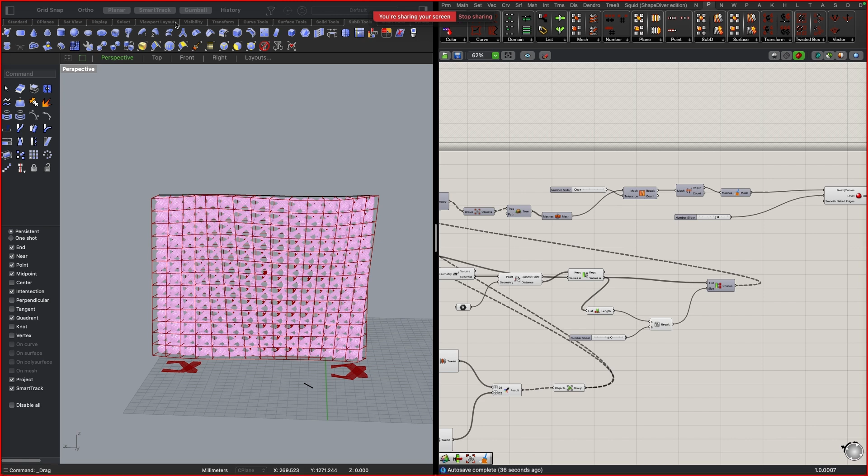So I told you that maybe we will do the second part, but to be honest, there is no time to do it from the start, but just to show you how it could be done.

So if you go to here, basically our module is how I showed in the presentation of Erwin. It's this one here that you need actually to model, yeah? So you could actually have done it from the same one that we did.

The only difference is that they need to connect right now. So basically you're gonna get more modules here. So if I would do it to NURBS...

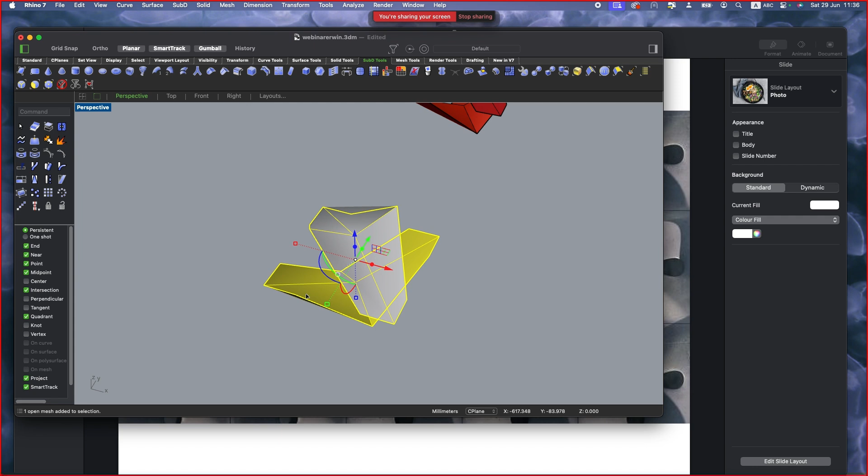Basically this one should get connected here and these two babies should connect here. So probably what I would do is to explode this one.

Okay, let me explode also this one. And then you kind of need to loft these two. So that it creates something like this.

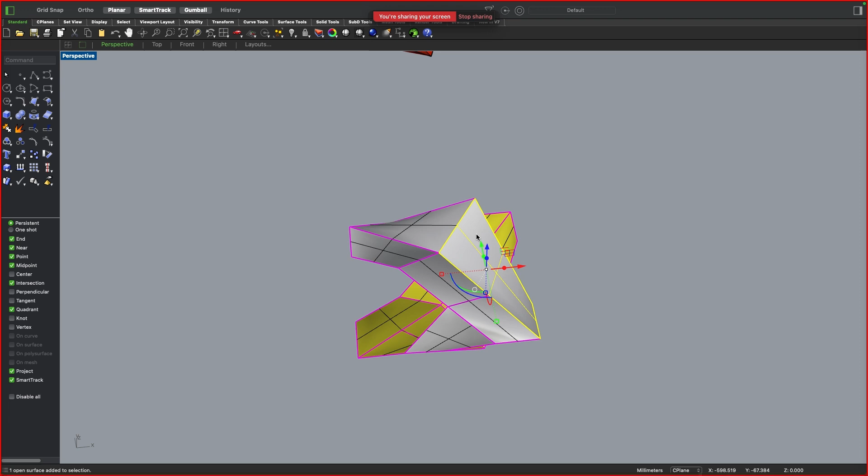Like on the shaping you would have to work, it's a little bit more difficult of course, but let's just see quickly what happens, because probably it will not exactly give us what we want, it would require some sculpting, let's say. But just to see.

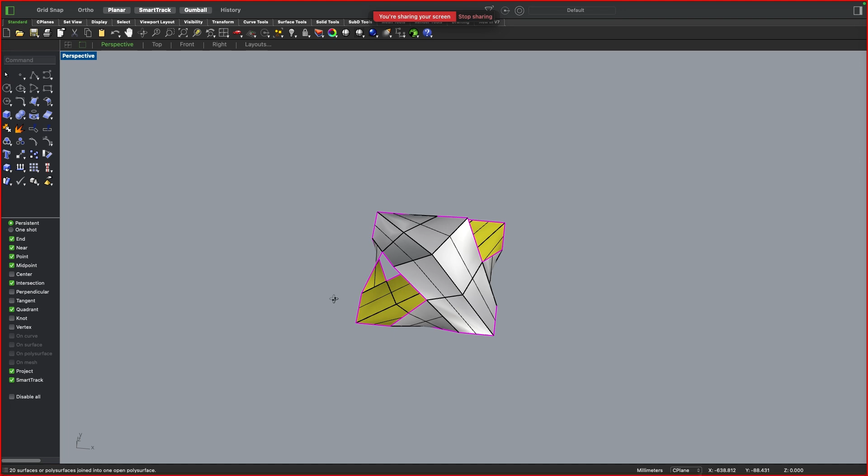And probably here we need to separate this also. Well okay, let's, anyway, in case if you want to do it later, you can do it. So I will just do it quickly. So you will have a module that is more like this.

Where's my grasshopper? And so if you go back to this configuration here, so here and okay, twisted box, okay, target.

Okay, when you do things like that, disable. So here, here, here. It will probably not be right now because I made it too fast. But let's just see what happens.

Because I think probably this has to be separated. And geometry has to be this one.

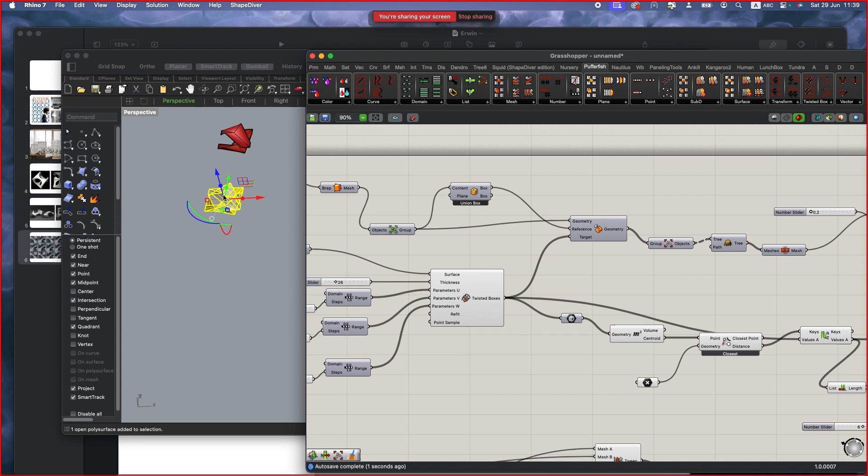Well, he starts to do something, but it's still not there. Because as I told you, it has to be separated. So, oi. So he made something, but not exactly what we need.

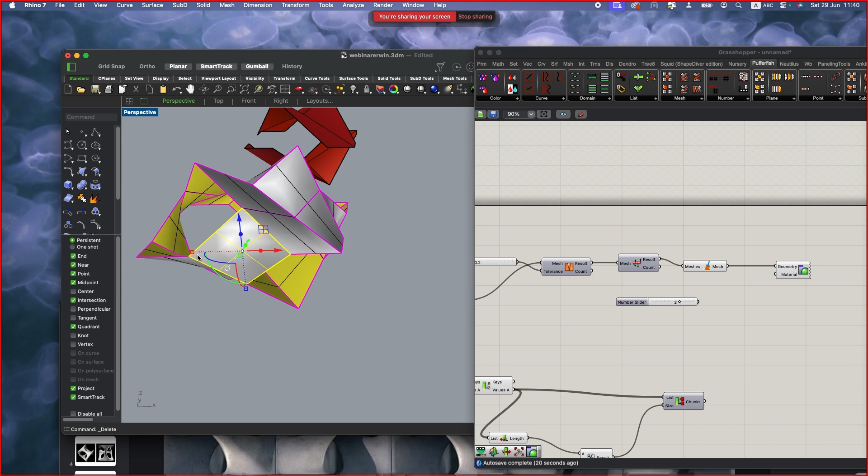So if you feel like trying, you can try to work on this one if you feel like doing extra homework. So try to do this, but in a triangular form. So try to work on the shape. Just watch the module there, and then you need to make this one without projection.

So it has to be something like this, and then on the bottom also, so that at the end they can merge together and weld together. So try to do this in order to get this part on here. So today we did the one that is not even here, this one, which is still pretty cool. And now from that one, you can actually derive this one. If you try and you don't manage to do it, let me know, write me an email and we can see.

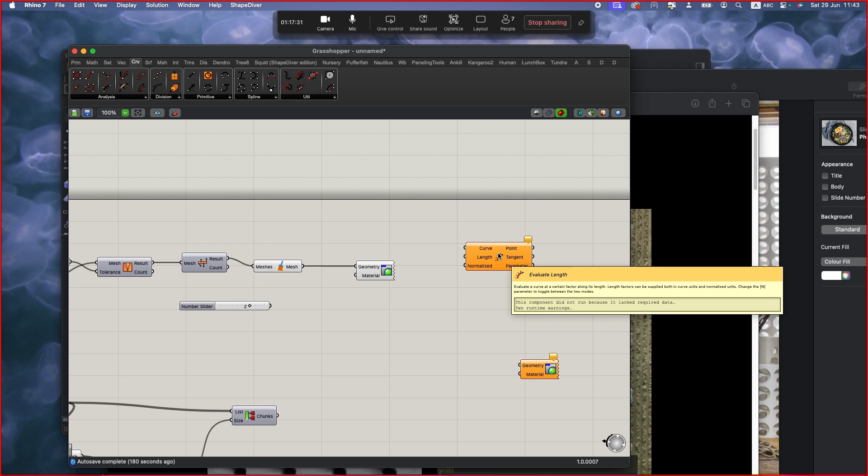So to be honest, I understand your question, and yes, it's a true problem that Grasshopper has like 1,000 commands. So when I started, I just started to look in all of the standard panels, and I started to look at each command. I started with the basic ones, for example curve, and then I would see, for example, what is evaluate length, and I would just start to read. So for example, evaluate a curve, this.

Also, there is a website with the whole explanation of all of the icons. But to be honest, it's not so useful, because at the end it's the same thing as they write here. So just start from the panels and learn them step by step. What helps is to constantly do different examples, try different things, do a lot of exercises from the internet, and try to use fewer plugins. The fewer plugins you use, the better for you, because most things already exist within Grasshopper itself. So you don't need most of the plugins out there.